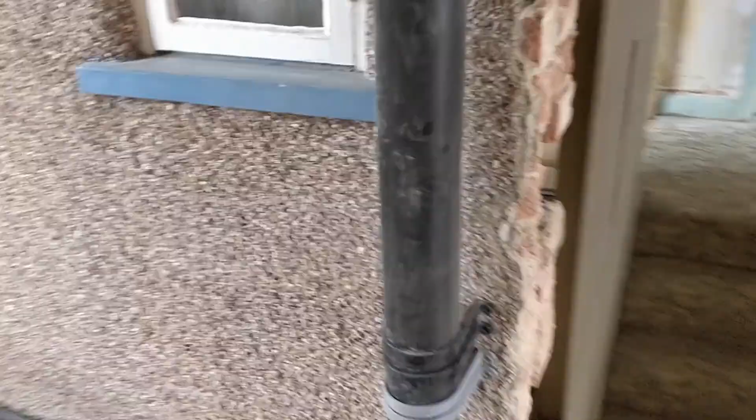This is a video kind of in between me doing these studs, so if you haven't seen that, I'll put it up there. It comes after, but I'm doing it at the same time, hence why the studs aren't there, despite a previous video showing them.

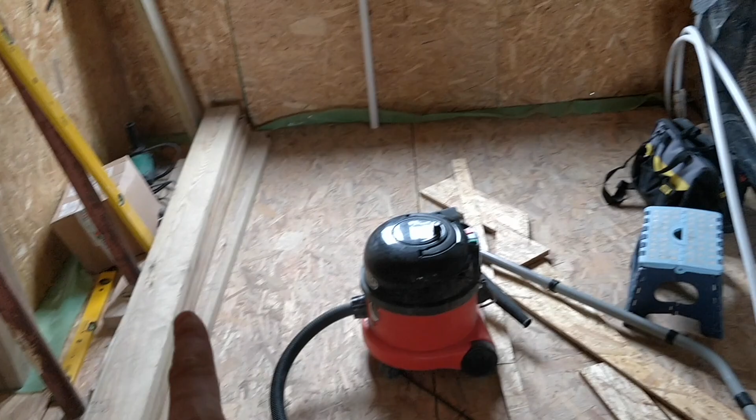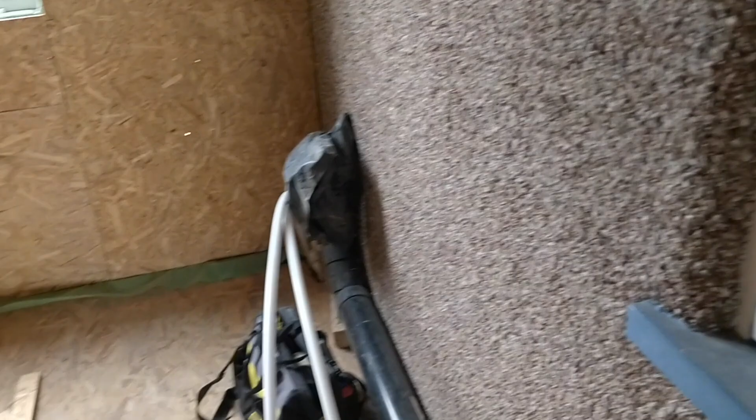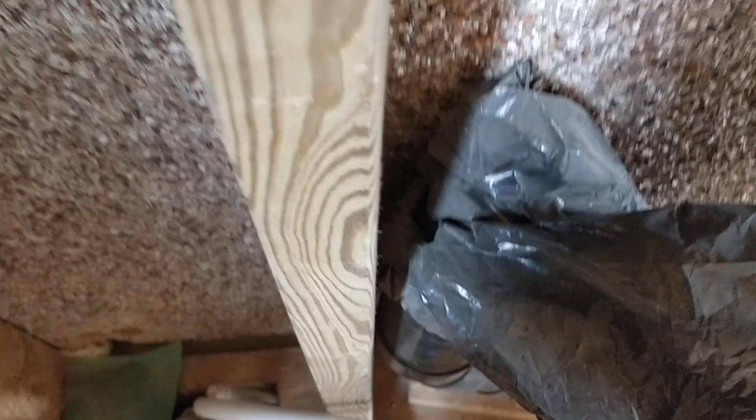I'm just turning my attention now to this false wall, stud wall that's up against the brick. What we're doing is hiding the soil pipe and all of the service pipes in this void, by taking these 6x2s and running them in the wall like this, because that gives a nice gap between the wall and the poo pipe, which is great.

Gives us loads of space. We can insulate it, and we can also run duct work for the bathroom next door, so we can finally put an extractor fan in the room on the other side of this, which is also a bathroom.

So what I want to do now is spend a little bit of time thinking. I like spending time thinking, and then I seem to spend less time doing, on what I want this to look like, because fixing stuff to pebble dash on a short vertical side is a real pain. In fact, it doesn't really work at all.

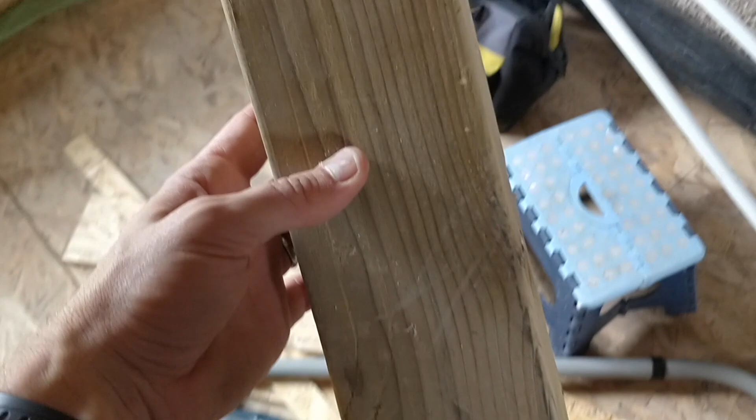So what I'm considering doing is getting some offcuts of timber and bolting them to the wall this way, and that gives me something to fix. I can then put the 6x2 along this side here, or on that side there, and fix into this, and that will give me a really strong fixing.

Obviously that uses a lot more timber, but I have been quite careful to keep a lot of offcuts and essentially scrap bits of wood. I've kept them because I don't like throwing wood away if I can avoid it, but also you never know when it's going to be useful.

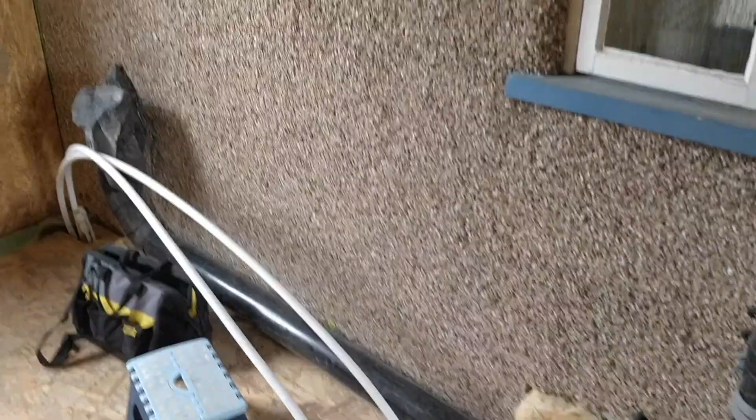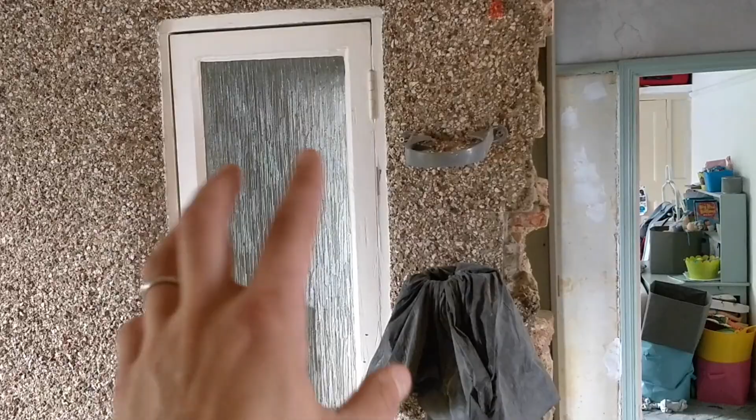So that's that. The other thing I'm thinking is we're going to be having the shower in the corner here, and it's going to be a quadrant shower. So it's got a curved side here and then a straight and a straight, and it'll have a drain running down into that port there. The shower head itself is likely to either be on this side on the stud wall or on this wall here, but it's made a bit more tricky because of that.

So either way, I need to get water pipes to the shower head, hot and cold. What I think I'll probably do is fix it so there's a service channel here, so I don't have to drill holes through this. I mean, I can do, but if I've got bits of wood stuck on the wall and then bits of wood up on there, drilling holes is going to be tricky.

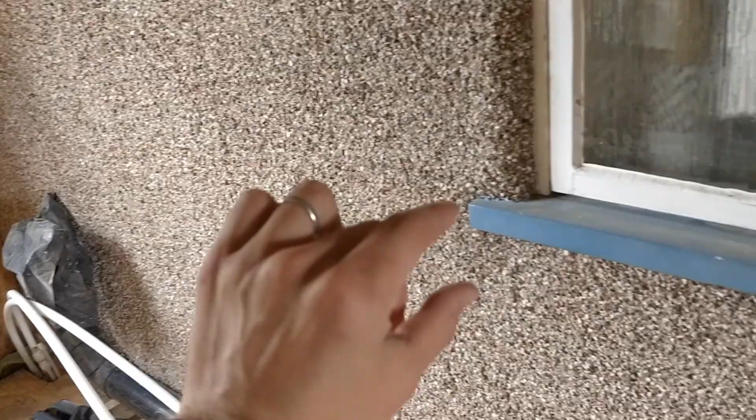So what I might be able to do is run a service channel through at this sort of height the whole way around, allowing me to run the pipes through there. So I'm just going to spend a bit of time thinking about it, and then I'll crack on and show you what I'm doing.

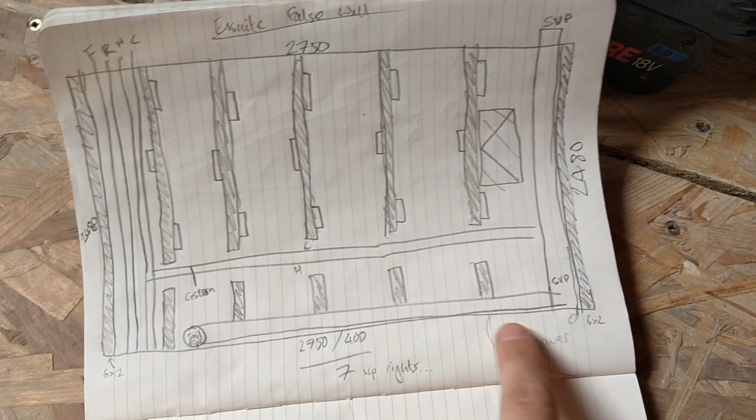Okay, I appreciate to you guys this just looks like nonsense, but it makes a lot of sense to me and is really helpful. So along the bottom here, let me lay this down. Along the bottom here, we have that black soil pipe. Obviously that will be turned down because the toilet will be facing here.

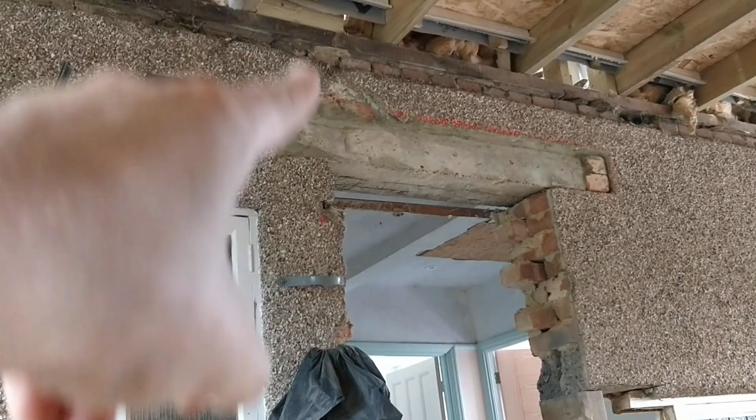So I will need a whole load of uprights going across here, and I can have a stud right in the corner there, and I'll also put a stud on the other side of that soil pipe, which is going to carry on going all the way up, by the way, and we'll have it go up in the loft above. But then there'll need to be a break in here.

Need is a strong word. There doesn't need to be, and maybe I am just making more work for myself in reality by not just drilling big holes in it and feeding the pipe through the holes.

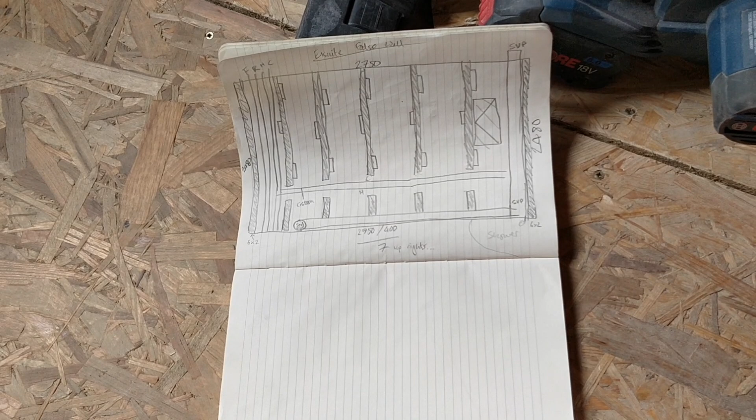I'm still undecided. I might call Nick and ask him, he's the plumber, what he wants to do. He'll probably say do what you want and I'll work around it, because he's that good.

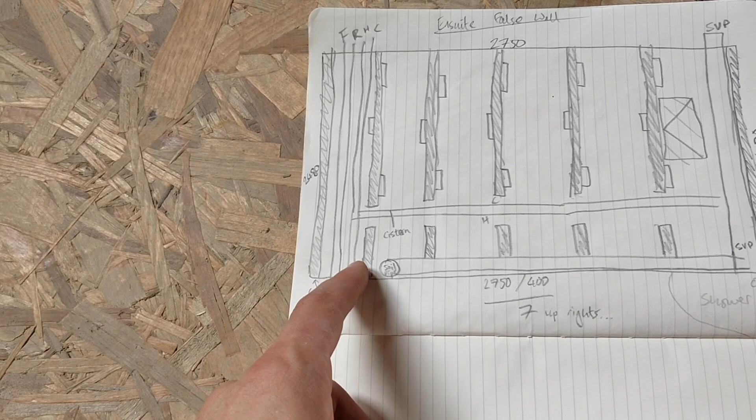But either way, we'll have the flow and return running up here. These will actually be pinned to this 6x2, these flow and returns, using some clips, and the same with the hot and cold on this side. But for the sake of ease, I've just drawn them on there so I know they'll be up through this channel.

And then once they're up here, they'll kind of tee in this way through the insulation and do their thing up there, because up there we have the ensuite for the loft conversion. So yeah, that is where we're at. That's what I'm up to.

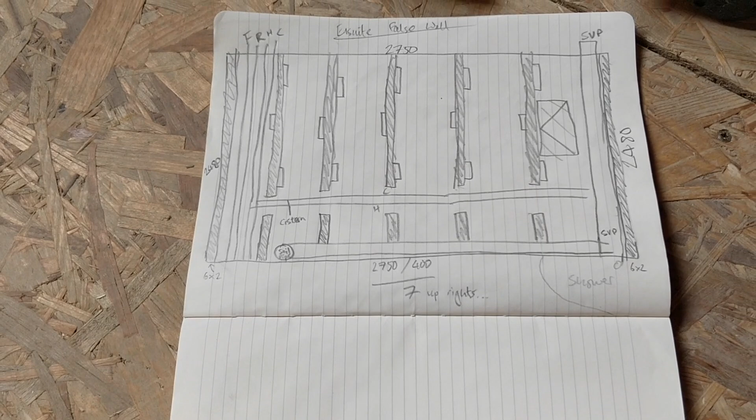Now with this is the window on the other side of the downstairs toilet. That is going to be decommissioned. I'm actually going to screw it shut from here, put some screws in and screw it shut. The other thing I want to do is leave it there and use it, because we're going to turn that downstairs toilet section into a kind of storage cupboard, linen cupboard, that sort of thing, and decommission the toilet in there.

So what I'm going to do is run LED lights around the edge of this frame, and run the wiring back through so that when you turn the light on in that bathroom, these LEDs switch on. It's going to be fairly basic, not too fancy, but I think it will just look really nice. I'll have the transformer and run the cabling and all that sort of stuff so it's easy access. While I'm here with it all open up, I'll be doing that as well.

The other thing to consider in the bathroom next door, currently we have these vent holes, so moist air will be coming out from there, so I'm going to have to block those up there and there. I'll basically just fill those in, cover them up, and that way when the plasterboard or cement board is on this side, it won't be rotting away and soaking from moist air coming in through there.

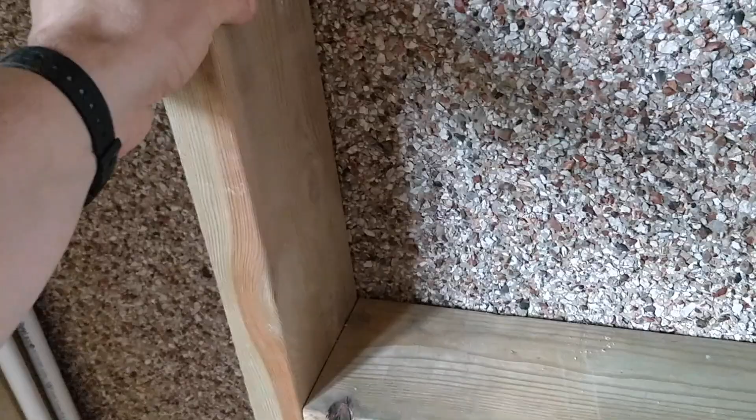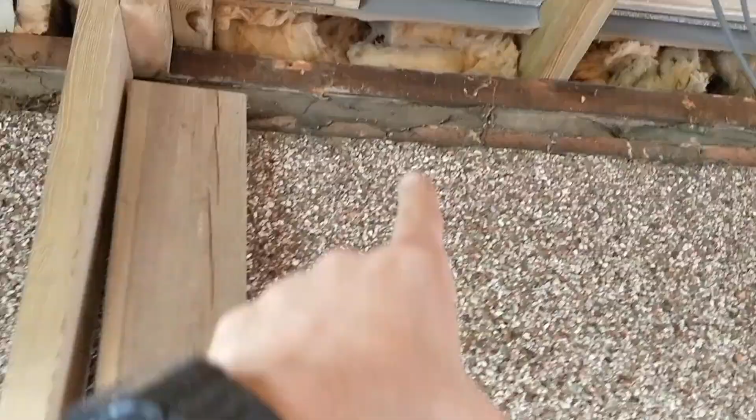Right, I have 3 of these up now. You can see how it's starting to look. It's actually surprisingly sturdy, got a noggin in there. What I've done is fixed it up at the top there using a block. So I'm at 400 centres, so I've got a block there, 400 centres ends up in between the two. So I'll either fix it into that head plate, or do the system I showed where I bolt into the wall here and then into the timber.

But it is going okay, going fine. Fixing into pebble dash is grim, frankly. But I've left enough space there that I can still clean that and fill that in. That's no problem. I've attached the flow and return pipe up there. When these get extended, they can run up this channel. So yeah, we are getting there. If I do a noggin across here, I'll obviously leave a space for those.

It's coming along, and I'll probably put another noggin in up here as well, so there's one there and one there. But I'm actually running out of timbers. I've got this one here, and that one I'm standing on, and then that's it. I think I've got some out in the garden, but none long enough. So that's a real pain, because I just took delivery of a whole load of timber and could easily have included that in the order. So I might be popping to the timber merchant tomorrow morning.

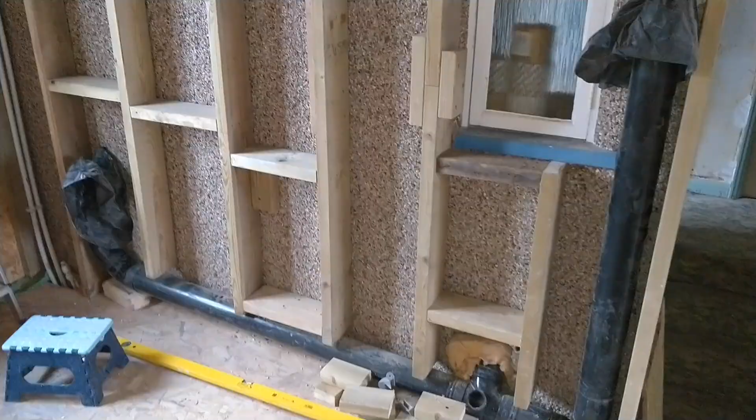It is the end of another day. Lots of tidying up to do now for me, just a quick bit of hoovering. But I am finished. I know this looks like a really shoddy patchwork, but please remember this is a non-structural wall. We are not even going to be hanging tiles on these walls. This is merely something for the plasterboard to catch.

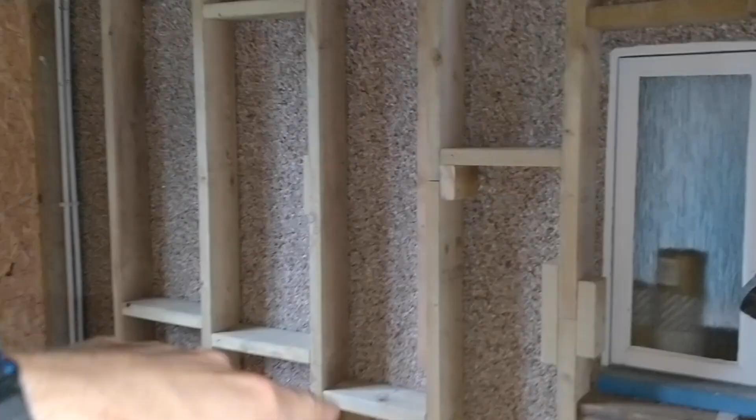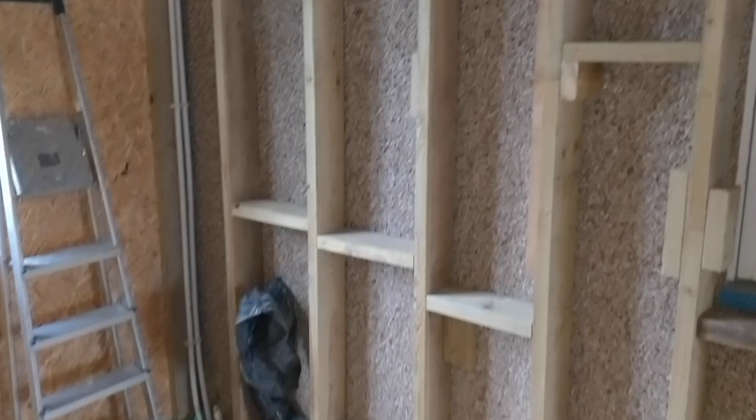It's a bit late in the day, but I will be putting some extra noggins in here and here. Maybe there, maybe - yeah, I probably will put another one down there. I haven't done this step thing for any reason other than I just arbitrarily took a measurement and stuck it in there. It is very, very sturdy, I'm surprised at how strong it is actually. But I obviously can't put any noggins straight up here because this soil pipe is going to be running straight up, so I can't have anything going across here.

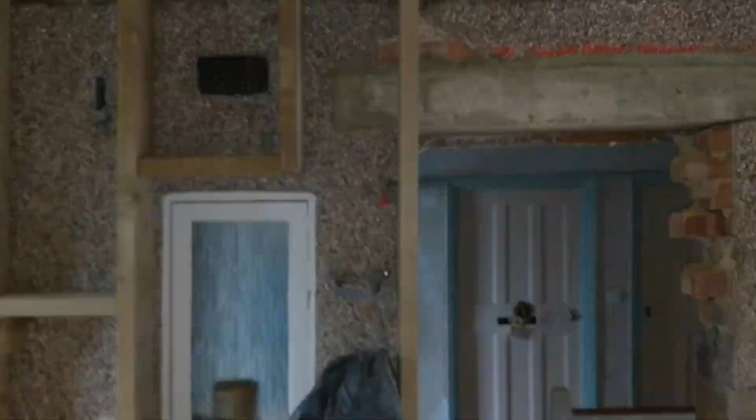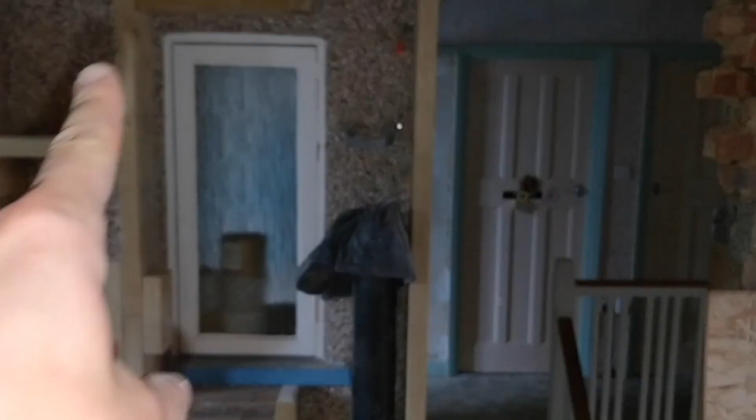And yeah, I didn't want to have anything blocking that window just yet, so I haven't put anything there. I think I may have to do something because that's quite a big gap to not have anything. But equally, what I might end up doing is framing it out more formally and then having it as a kind of nook or recess within the shower, but potentially - I haven't decided yet.

So yeah, it's now 7 o'clock, so I'm going to stop here. I'll hoover up and clean up and everything in the morning. But it's been a good day, it's been an efficient day.

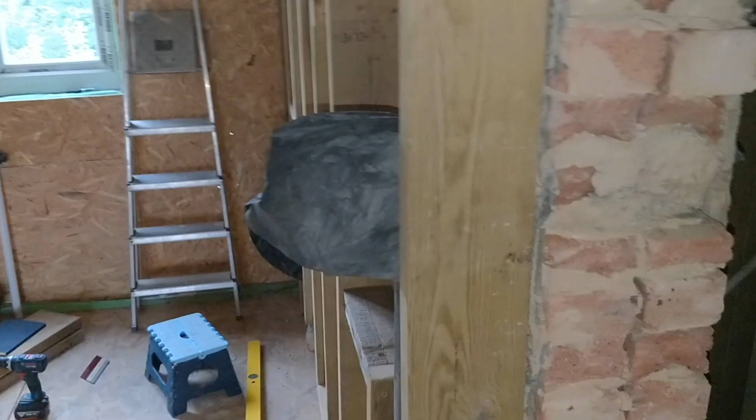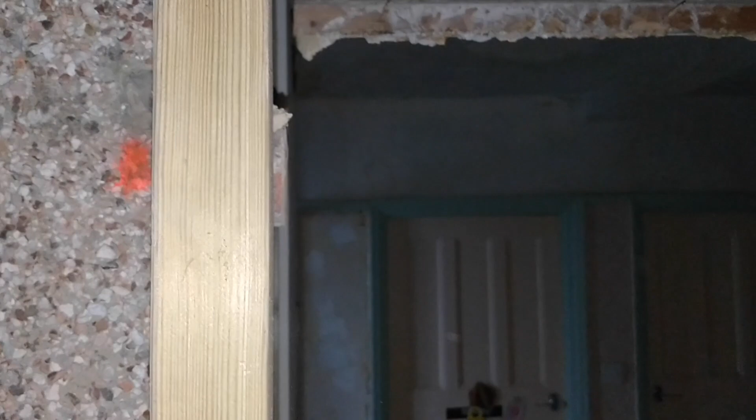So yeah, that is the stud wall, this stud kind of false wall, all but done. It's quite tricky to get them all the same level this way. You see there are a few imperfections, but I have to say it is pretty close actually, and they're all plumb, which is really nice. And this one here, I just need to shave off a few little bits of brick up there and a few bits that stick out, and then this runs perfectly flush with the inside of this one here, so this will run really nice and flush across there. So I'm really happy with how that's come out, and I'll be able to run a flush piece of plasterboard straight over across that. So yeah, it's gone well.